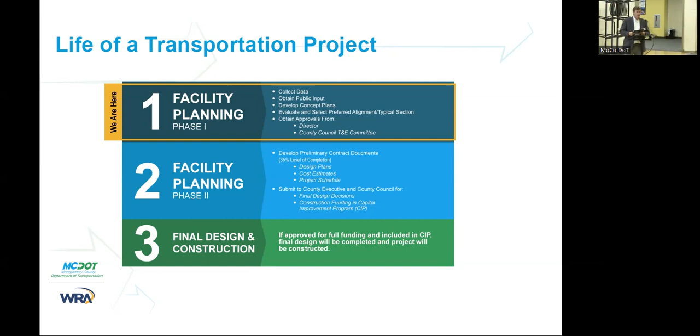We are starting the project tonight meeting with the project outline. We will present the following outline tonight: project limit, project overview, purpose and need, and conceptual design for the following four alternatives.

Alternative 1, no build, no improvement to Old Columbia Pike and Prosperity Drive. Alternative 2, improving intersections within the limit of the project, as well as adding new sidewalk and side path along the road. Alternative 3, improving intersection safety and operation, adding sidewalk and side path, and opening the existing bridge to traffic. Alternative 4 is alternative 3, plus widening Old Columbia Pike and Prosperity Drive to 4 lanes and replacing the existing bridge.

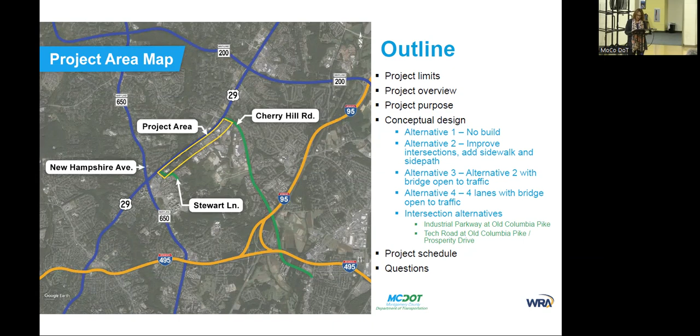Next, we will discuss intersection improvement alternatives at Old Columbia Pike with Industrial Parkway and Tech Road. Then we will go over the project schedule, and lastly, we will finish with the question and answer session.

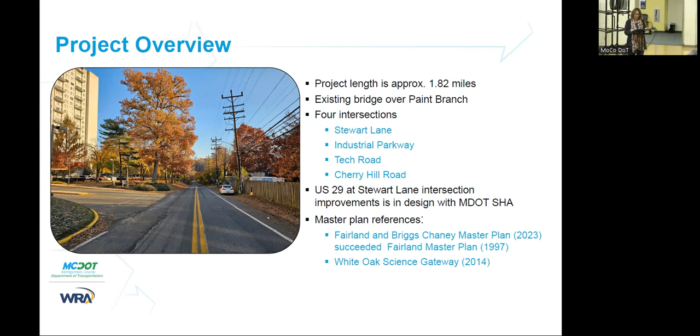Old Columbia Pike and Prosperity Drive is approximately 1.82 miles long. The road from Stewart Lane to Tech Road is called Old Columbia Pike, and from Tech Road to Cherry Hill Road, it's called Prosperity Drive.

There are 4 major intersections within the limit of the project. Beginning at the southern limit of the project and traveling north, these intersections are Stewart Lane, Industrial Parkway, Tech Road, and Cherry Hill Road. The project is being closely coordinated with the MDOT SHA Intersection Improvement Project at US 29 and Stewart Lane. It has been included in the 2023 Fairland and Briggs Chaney Master Plan and the 2014 White Oak Science Gateway Master Plan. Our concept plans are following recommendations in the master plans.

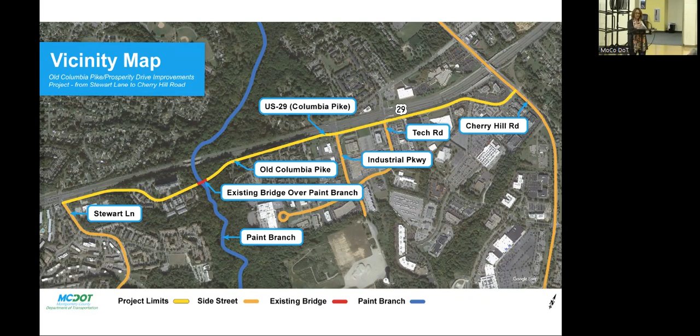Next slide, please. The purpose of the project is as follows: we are focused on the connectivity and safety needs along Old Columbia Pike and Prosperity Drive, improving the existing traffic pattern, operation, and geometry deficiencies, installing sidewalk and side path along Old Columbia Pike and Prosperity Drive, improving drainage issues within the limit of the project, and enhancing safety for pedestrians and bicyclists in keeping with Montgomery County's Vision Zero Action Plan. The goal of the Vision Zero Action Plan is to end serious injury and death on our roadways.

Encourage equity and accessibility by providing continuous pedestrian facilities to promote a safe environment for pedestrians and bicyclists. This project will benefit the underserved communities.

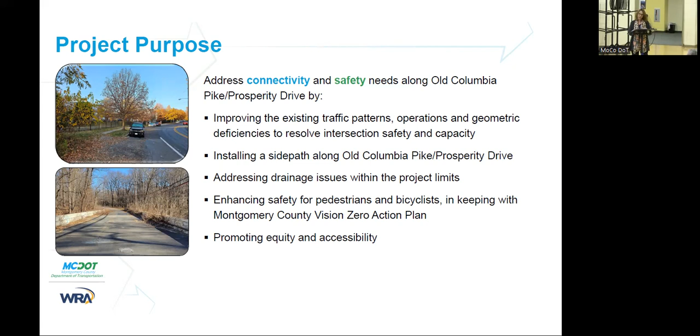Bridge over Paint Branch: the bridge is approximately 200 feet long and 27 feet wide. It was built in 1912, widened in 1930, and rehabilitated in 1973. This bridge has been registered with the Maryland Historical Trust, and it is eligible for listing in the National Register of Historic Places. Currently, it is closed to vehicle traffic but open to pedestrians and bicyclists.

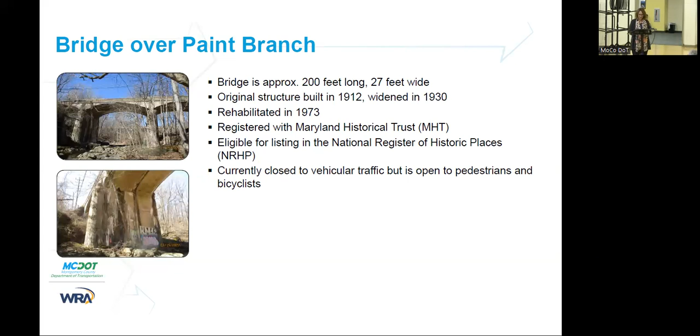I'm turning it over to Mike. Good evening. On the next couple of slides, I'm going to walk through some of the existing conditions, some of which are good and some of which we will be looking to improve.

On the first photo, you can see, as we all know, some traffic backups that occur on Tech Road and Industrial Parkway. So part of what we'll be looking at, not the total focus of this job, is to improve traffic operations at these intersections.

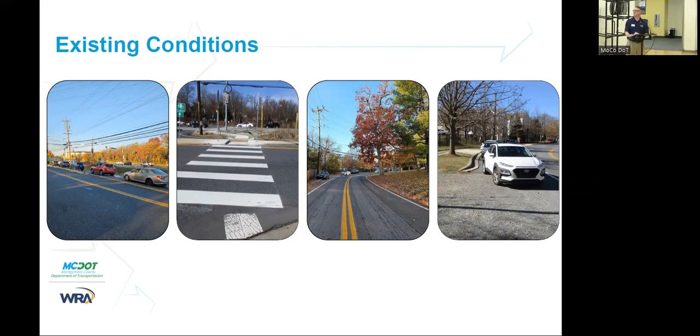Some other issues are ADA or sidewalk ramps that are not ADA compliant. The second photo actually shows a pretty good example of one that is compliant, but there are other ones throughout the corridor that need help. There's also some unsafe or unorganized parking that occurs, especially south of Paint Branch Bridge, and so we'll be looking to improve those issues.

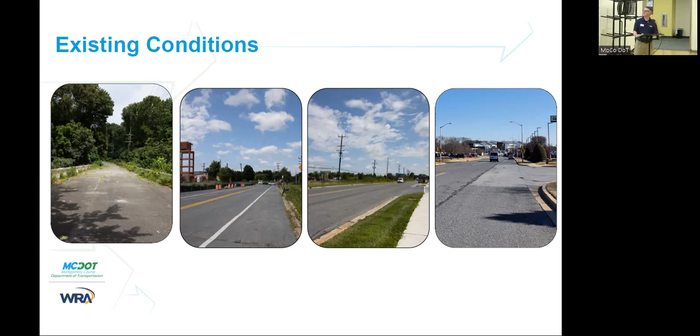Here are some photos walking through the corridor: the bridge over Paint Branch that's open to pedestrians and bicyclists, then up towards Industrial, Tech, and then up towards Cherry Hill Road.

Some of the pedestrian and bicyclist improvements that we'll be looking to make under all of our alternatives include adding 6 foot wide concrete sidewalks, and a 5 to 6 foot wide grass buffer, which is just the area from the curb out to the sidewalk or side path. We'd also be looking to add a side path on the other side of the street, and we'll get to that when we get into the alternatives.

That would always be a 10 foot wide side path with a 5 to 6 foot wide grass buffer. That side path provides space for not only pedestrians but also bicyclists or personal electric vehicles such as scooters. On all the alternatives, there would be pedestrian and bicyclist improvements all the way from Stewart to Cherry Hill, and at the intersections we'd look to provide ADA compliant crosswalks and geometric improvements.

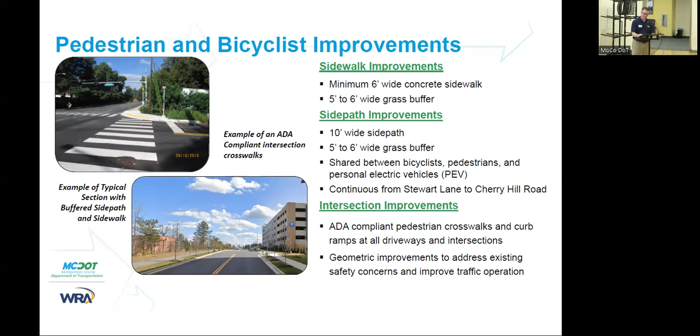Some of the ways we'll make this project safer for pedestrians include protected intersection design. In the upper left corner is an example of physical separation of vehicles and pedestrians, clear signage, clear pavement markings, and even push buttons for pedestrian signals.

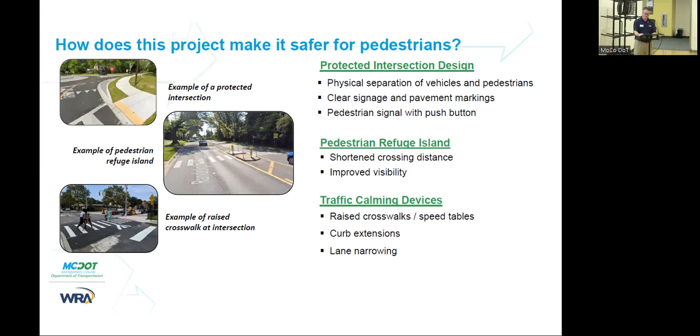Also, pedestrian refuge islands make the crossing shorter and improve visibility for motorists and pedestrians alike. We'll also look at potentially using traffic calming devices such as raised crosswalks, speed tables, curb extensions, and lane narrowing as we move forward into planning.

Our design is also guided primarily by the Montgomery County Complete Streets Guide. This is a guideline that's come out in the past few years that is really focused on pedestrians and bicyclists, but also keeps the needs of all users, including motorists, in mind.

There are 3 street types from that manual that apply to this corridor: the neighborhood connector, Town Center Street, and Town Center Boulevard. On the next few slides, we'll go over each of those types.

The first one, the neighborhood connector, applies from Stewart Lane up to Industrial Parkway. It has a 25 mile an hour target speed. I'll define target speed as the desired speed that we design for, based on our design. It would have 10 to 10.5 foot wide lanes, a 6-foot sidewalk on one side of the road, and a 10-foot side path on the other side.

Neighborhood connectors are typically in residential areas, and they are good for all users, including pedestrians and bicyclists, but they can also even support transit.

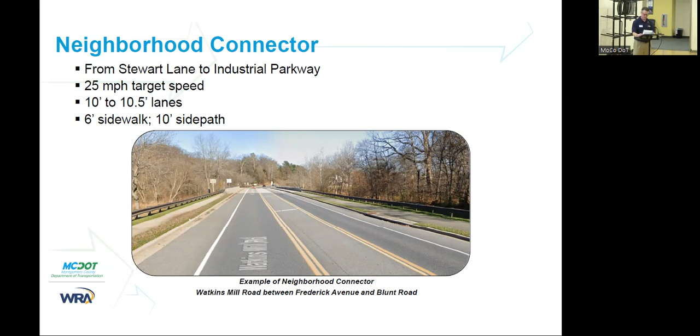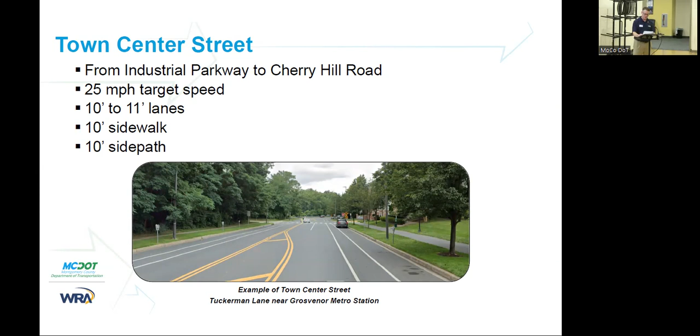The next slide shows the Town Center Street type that runs on this corridor from Industrial Parkway to Cherry Hill Road. It also has a 25 mile an hour target speed with 10 to 11 foot lanes, and the sidewalk goes up to 10 feet while the side path remains 10 feet. Town Center Streets are usually in residential areas, but also more commercial ones, and they can have on-street parking and more significant pedestrian and bicycle activity.

The next slide shows the last of our street types, Town Center Boulevard. This is for multi-lane roads, and only applies if alternative 4 is selected, which is the only alternative with multiple lanes. If that alternative were picked, this street type would apply all the way from Stewart Lane to Cherry Hill Road. The target speed goes to 30 miles per hour, with 10 to 11 foot lanes, a 10-foot sidewalk, and a 10-foot side path. So that is our 3 street types.

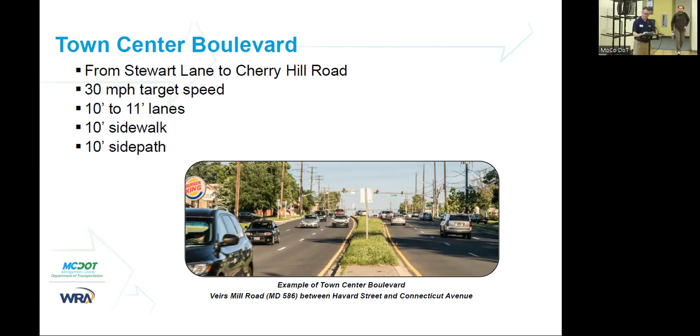So with that, I'm going to turn it over to Cheng.

Thank you, Mark. Full disclosure, I'm an engineer, not a motivational speaker. I'll try to keep you engaged and hopefully not put you to sleep as I go over the next 30 slides. There's a lot of information to cover, but there will be a question and answer session at the end, and people online can post their questions through the chat to Lori. So please remember everything I say—don't fall asleep by the end.

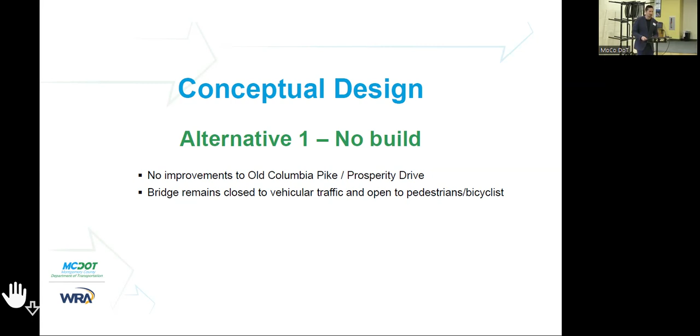The first alternative is no build, self-explanatory. This will stay status quo, and the bridge will be closed to vehicle traffic but open only to pedestrians and bicyclists.

Alternative 2 will improve intersections within the project corridor and add sidewalk and side path. The Pike and Prosperity Drive will remain 1 lane in each direction. We'll improve intersections, install pedestrian and bicyclist improvements, and install lighting where it's wanted. The bridge will remain closed to vehicle traffic and open to pedestrians and bicyclists only.

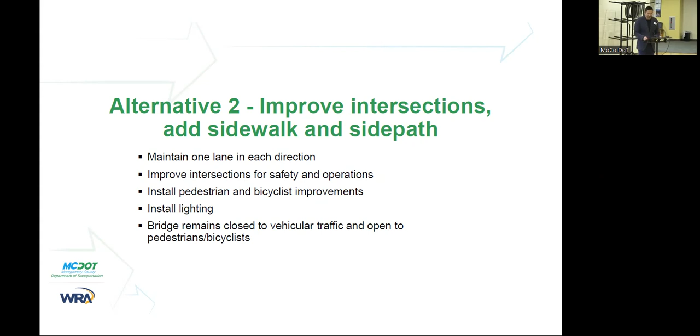Now, for the next couple of slides, we're going to walk through the project corridor. We're going to start from the south, starting at Stewart Lane, and then we'll progress moving north.

US 29 is a state-owned, SHA-owned and maintained highway. Old Columbia Pike is a county-owned roadway. SHA currently has a project in design that improves pedestrian crossing at US 29 and Stewart Lane, and also at the Old Columbia Pike intersection. We're going to relocate the existing connector a couple hundred feet to the north, because there's a storage and queuing issue there that they're trying to resolve. They're designing the improvements based on Montgomery County's complete street design guide, and install a side path on the east side with buffer, and then parking with curb extensions to improve pedestrian safety.

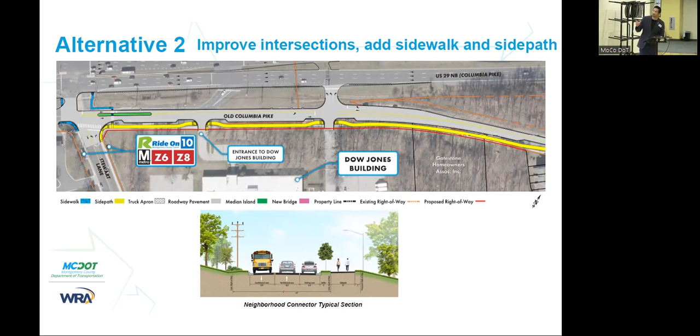The typical section is 10 and a half foot lanes, an 8-foot parking lane, a 5 to 6 foot buffer, and a 10-foot wide side path. There won't be any sidewalk on the west side in this segment because of the close proximity to US 29.

As we progress north, when Old Columbia Pike moves away from US 29, that's when we add a 6-foot wide sidewalk on the west side with a 6-foot wide buffer. We continue the same on the east side moving towards the bridge. Vehicle traffic will have to turn right at Carriage House Drive as they do today, and pedestrians and bicyclists can continue north using the existing asphalt surface to cross the bridge.

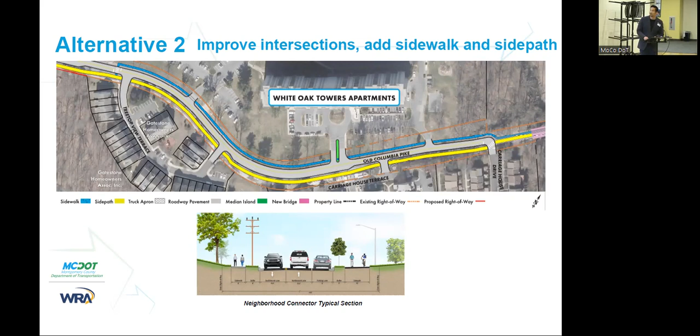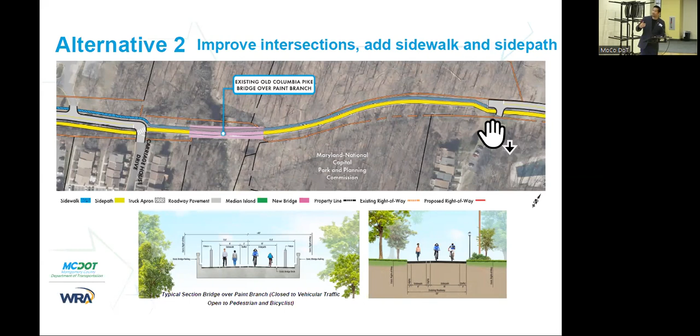Next slide. On this asphalt, we'll add solid white pavement marking to differentiate the sidewalk and the side path, with a buffer in between. Lighting will be added in this segment because it gets pretty dark there at night. When it joins up with Old Columbia Pike on the north end of the bridge, the sidewalk will consolidate with the side path, because we won't have any sidewalk on the west side due to close proximity with US 29, but the side path will continue north from there.

This is a rendering of what it may look like standing south of the bridge looking north. You can see the existing bridge with lighting on the side, pedestrian railings, and solid white markings on the ground.

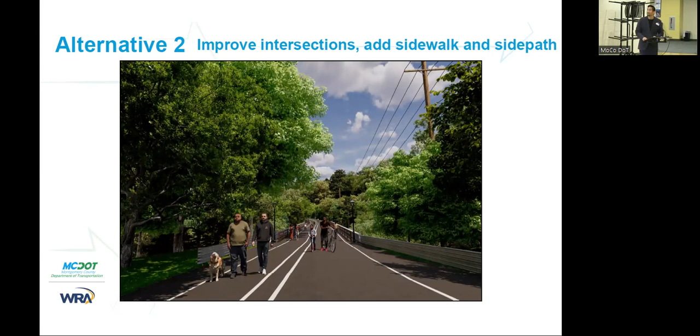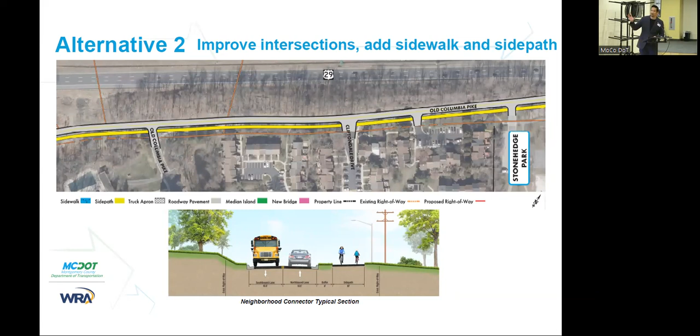Continuing moving north, US 29 is on the top of the screen, north is pointing to the right, as you progress north towards Stonehedge Park. There is an existing park improvement project - they want to replace some equipment, but our proposed improvement has no conflict with what they're trying to do there. The existing side path there will remain in place.

Moving north from Industrial Parkway, Old Columbia Pike / Prosperity Drive will be designed according to Town Center Street standards, as Mark described in earlier slides.

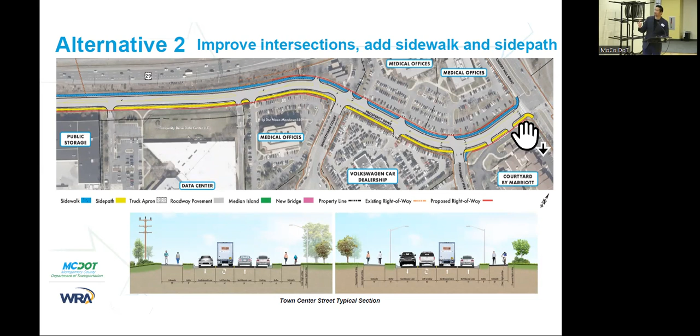As we come towards Cherry Hill Road, there's a data center on the east side where the hand points, and then medical offices, a car dealership, and a hotel. Here, parking will be made available on the east side to the extent that it's safe, and then there'll be a 10-foot wide sidewalk on the west side, and a 10-foot wide side path on the east side with 5 to 6 foot wide buffers.

In Alternative 3, everything outside of the bridge will be the same as what I've described in Alternative 2, except the bridge will be open to 2 lanes of traffic with pedestrian and bicyclist accommodations.

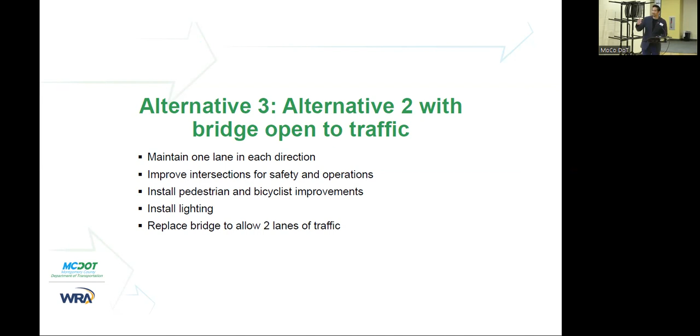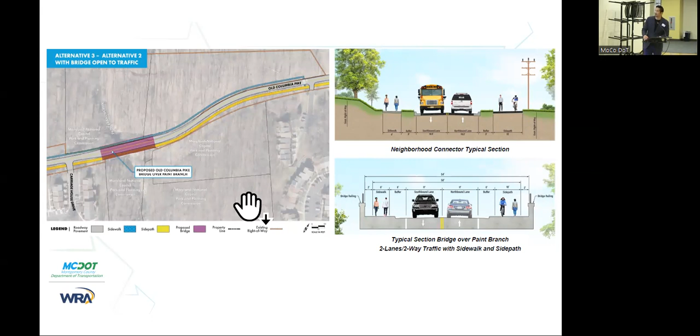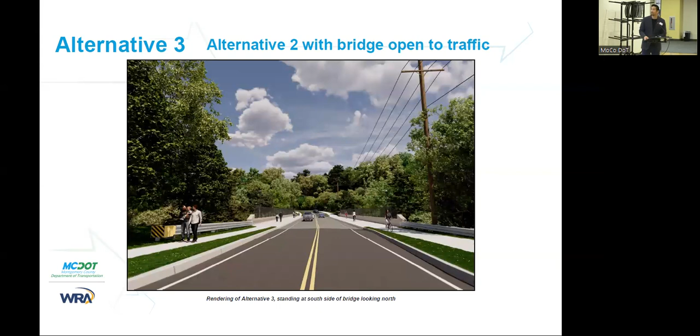In alternative 4, there'll be 4 lanes of traffic, and the bridge will be replaced to allow 4 lanes of traffic. This was one of the recommendations mentioned in the White Oak Science Gateway Master Plan, published back in 2014, to make Old Columbia Pike a 4-lane arterial roadway. However, in the same master plan, they did say that prioritizing multimodal connectivity and safety is a higher priority that we are trying to accomplish with this project.

Generally, a four-lane roadway will have a capacity of 20,000 to 30,000 vehicles per day, and a two-lane roadway has a capacity of approximately 15,000 vehicles per day. But our traffic model shows only 4,000 vehicles per day along Old Columbia Pike even in the design year, which two lanes is more than enough to handle.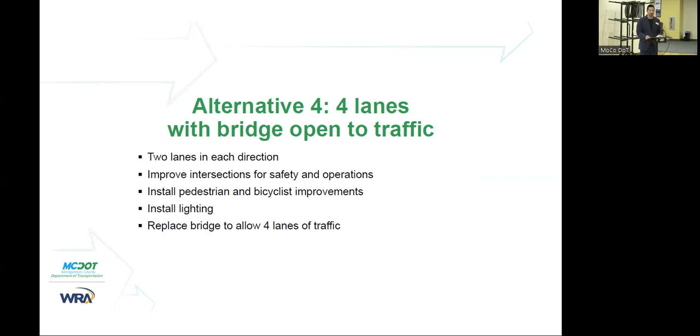Here, we'll tie into the SHA project, and then moving north, it'll be a four-lane, very wide section. There'll be two lanes in each way, a center median/turn lane, and then an 8-foot wide sidewalk on one side, and a 10-foot wide sidewalk on the other side with buffers.

As you can see, there'll be a significant impact on the townhouse community on the east side.

The bridge will be replaced with a significantly wider bridge to accommodate the wider section. There'll be significant environmental impact in this area because there's a Paint Branch, and also a lot of forested area in this segment.

The same thing, big section pushes along. It'll be a town center boulevard, as Mark described earlier.

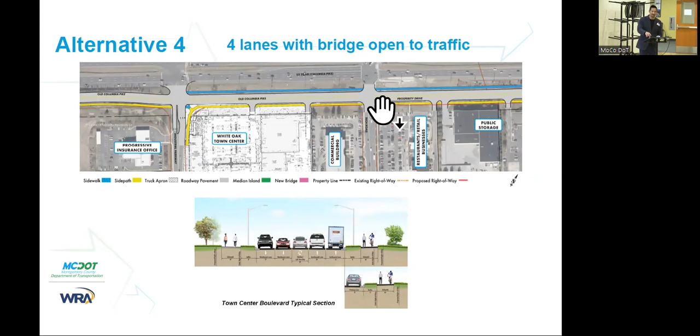As we approach Industrial Parkway, the sidewalk on the west side will be terminated because it's getting too close to US 29. If we go to the following option, the intersections at Industrial and Tech Road would need to allow through traffic. However, that creates a signal phasing problem that will not work with the US 29 intersection. The two intersections are too close to each other, and the problems at Industrial cannot be effectively resolved without resolving the traffic problem at US 29 at those two intersections. US 29 is a state-owned highway, so it is outside of this project scope.

The same intersection goes on to Cherry Hill Road, and significant impacts will happen. We'll have to take parking away from medical offices and the car dealership.

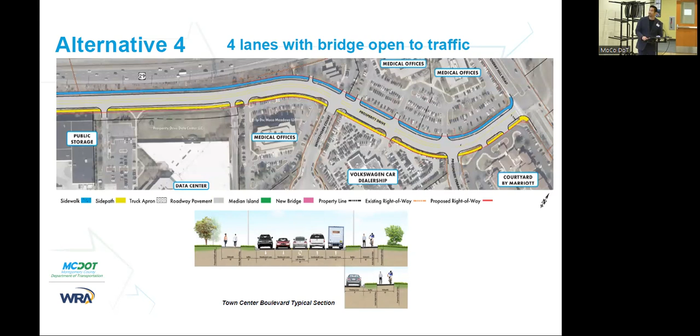Now we'll proceed to focus on the two intersections at Industrial and Tech Road. I'll first talk about the existing conditions there today.

Obviously this intersection lacks any ADA compliant pedestrian crossings. There's a lot of available pavement area there today, but there isn't clear pavement marking to tell people where to go, and that creates a problem.

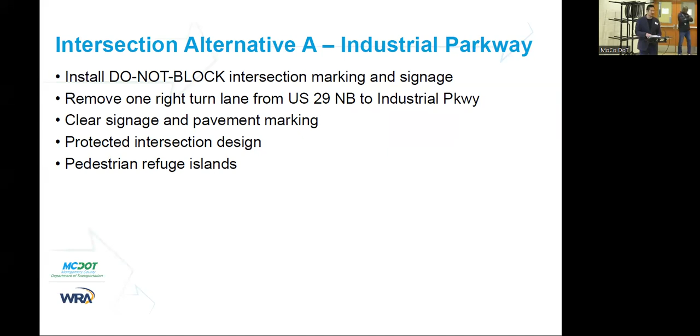These are some of the features that we propose in intersection alternative A at Industrial Parkway. I'll get more into detail on the next slide.

Intersection alternative B for Industrial Parkway is an incremental step up from alternative A, where we will relocate the existing signal from US 29 to Old Columbia Pike.

So vehicles will stop right there where the hand is. For westbound vehicles, they will stop there when the signal for westbound traffic is red, and when it turns green, the traffic will proceed and move on to US 29. That way, the pedestrian crossing across Industrial Parkway can be signalized, and the pedestrian crossing across Pike can be signalized as well, significantly improving pedestrian crossing.

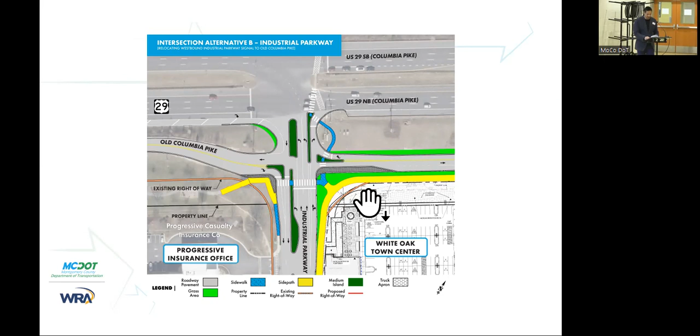Now moving on to Tech Road. As some of you who frequent the area may be aware, westbound traffic gets backed up and blocks the entrances to businesses like the Chick-fil-A restaurant in the business area down there, as you can see in the picture. Again, drivers get impatient because the queue gets long and they just ignore the stop-here-on-red sign.

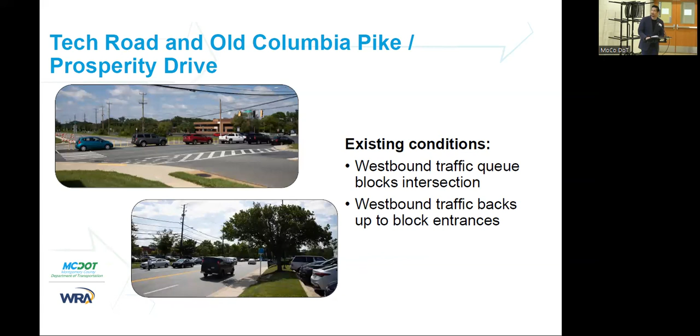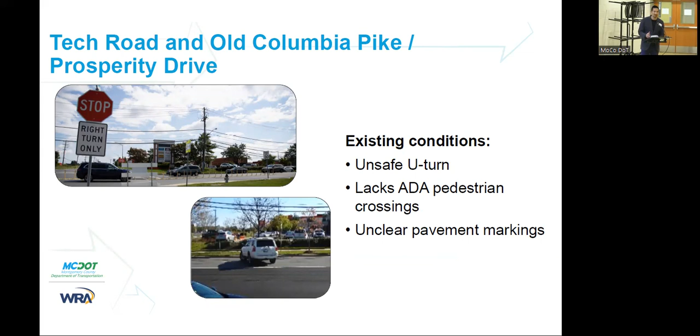There's a flexi yellow post in the middle right now. Oftentimes when westbound traffic clears the flexi post, they will make a U-turn to cut the queue. Again, this intersection lacks ADA pedestrian crossing, and there's a lot of pavement area, but lacks clear pavement marking to tell traffic where to go.

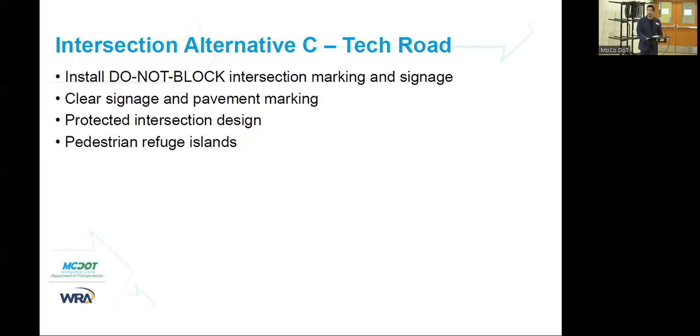In intersection C at Tech Road, I'll go through some of these proposed improvements on the next slide. Similar to intersection alternative A at Industrial Parkway, the traffic pattern remains the same, but we will add do-not-block-intersection markings and signage, high visibility crosswalk markings, and a median along Prosperity Drive to provide a pedestrian refuge island.

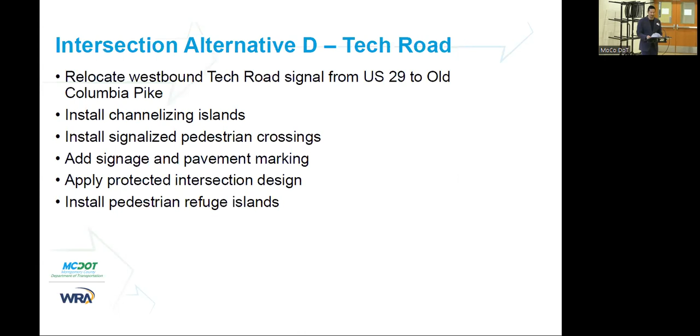Intersection alternative D at Tech Road is a step up from intersection alternative C. Similar to Industrial Parkway's alternative B, we relocate the signal head from US 29 to east of Prosperity Drive, so vehicles will stop there. That will help provide a signalized pedestrian crossing, so westbound traffic will stop where the hand is right now. When the signal head is red, they'll stop there, and when it's green, they'll proceed to US 29. That will help resolve the blocking intersection problem.

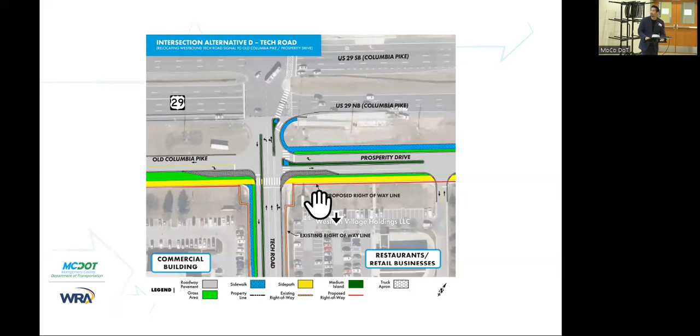Next, let's look at a summary of the alternatives. The main thing I want to cover is the cost. Alternative 2 is estimated at 25 million, including right-of-way and construction costs. Alternative 3 is 40 million. Alternative 4 is 60 million. You can also see the forest impact, vehicle impact, and right-of-way impacts.

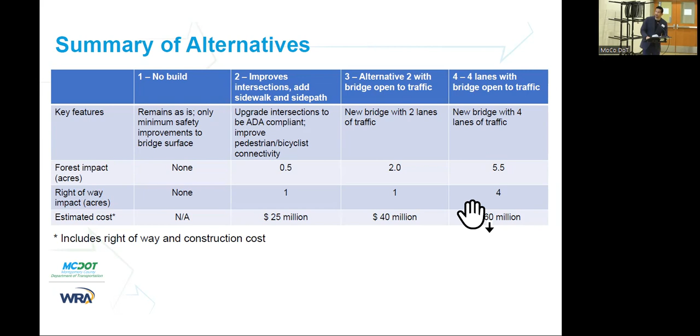Next, I will pass it to Yasmin to talk about the project schedule.

This slide indicates where we are with respect to the project schedule. The project started in January 2022. Concept plans were developed by April 2022. The first public meeting was presented in March 2023, and tonight we are presenting the second public meeting. The project will be completed by winter 2023. At that time, we begin the transportation environmental review, and then the project will be presented to our director and the county council T&E committee to obtain approval. The second phase of the project, the preliminary design, will start after receiving approval.

This is the end of our presentation. Please feel free to contact me if you have any questions or comments. My phone number and email address are shown here, along with our website and project link. You can go to our website to review our plans.

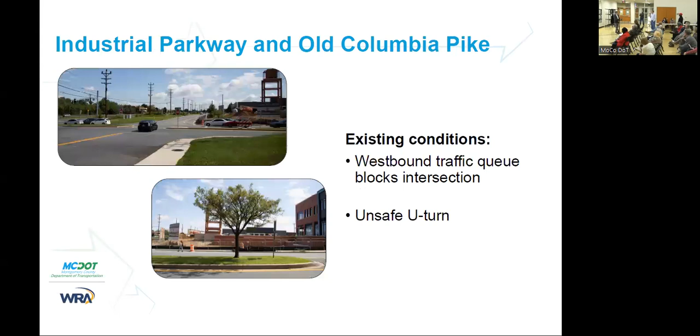Anyway, that's the key things, and I could go into a lot more detail. Part of it, it doesn't seem like you went back to the LATIP design for the interchange, for the intersections, and there's actually a pretty good design in there for Industrial, and I think the same thing could be applied to Tech Road to make the intersections safe.

So thank you very much for those comments, and we will take them into consideration going forward. So thank you. There's somebody behind you.

No, go ahead. Hello, I'm Eileen Finnegan, and I have a really basic question. I'm familiar with the White Oak Science Gateway Master Plan, and I'm familiar with the traffic modeling that was done at that time, which is almost 10 years ago now, maybe even longer. I'm curious about your modeling parameters for this, and I'm questioning, given the large capital costs and the potential question of the bridge, what modeling parameters you've used.

For example, there are some problems with the COG 9. If you used COG 9, there were some big problems with it because it did not include the FDA numbers in it. There was a big mistake down in Park and Planning, and they didn't think anybody was working at the FDA. 10.0 is out now, but that does not really look at the full build-out at Viva White Oak or the full build-out for the White Oak Shopping Center. And those were the big drivers for requiring some additional local capacity and using the Paint Branch Bridge as that way of providing that capacity.

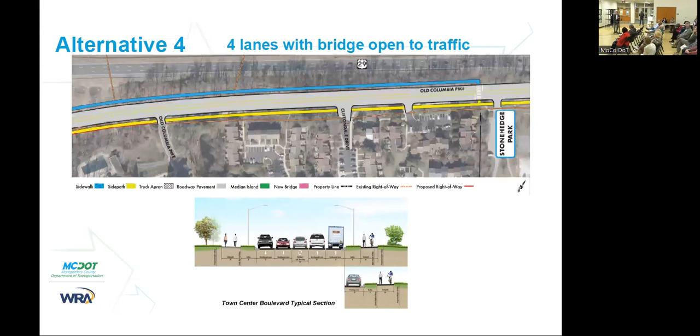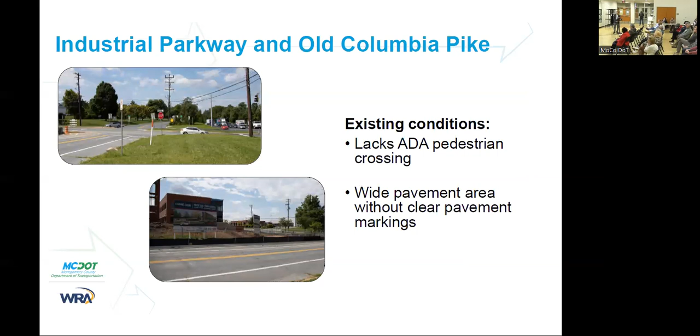I just wanted to make a comment about the intersection at Old Columbia and Industrial. I live in that neighborhood, and it's already difficult to get in and out of our neighborhood without there being some sort of light there. I really do think that needs to be addressed, because if there's no light on Old Columbia Pike at Industrial, there at least needs to be some kind of ramp or something to get out of that neighborhood. It's really, really unsafe right now, and I just don't think the existing options are going to address that.

Hey, thank you for the comment. Hi, my name is Corrine Majdanovich.

I live in the Stonehenge community, which flows right into Old Columbia. And as the previous speaker talked about, it's a nightmare right now for people that live in those communities to try to get from Old Columbia around Industrial Parkway onto 29. To be honest, this design looks more confusing than what we have right now, and I don't know how it solves any problem. I just hope that you focus on, as the previous speaker said, the intersections first. Everything else is beautiful to have these walking paths and biking paths, but these intersections affect daily life, a lot of people. Also in our community in front of Stonehenge, school buses stop on Old Columbia and pick up children. I can't imagine what's going to happen if you open a bridge and add more traffic onto this road.

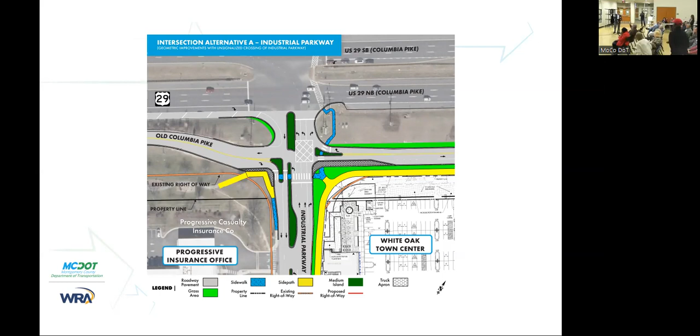Thank you for your comments. The question is who and when. So at the end of our facility planning process, which includes a presentation to our Director of Department of Transportation and to the Transportation Environment Committee of the County Council, they make the decision. Essentially, the county executive can make a recommendation in his budget, and the county council approves the budget. So if an option were chosen and money put towards a final design and construction, those are the decision makers.

Good evening, and thank you very much. I'm the White Oak Planning Manager. I work with Mr. Bunday. The only thing I wanted to do is re-emphasize what Dan said, which is there is an existing and approved local area transportation improvement program. Both at Tech Road and Industrial, you're going to have double lefts coming in, so you've got to have two receiving lanes, both on Industrial and Tech Road. Thank you for that comment.

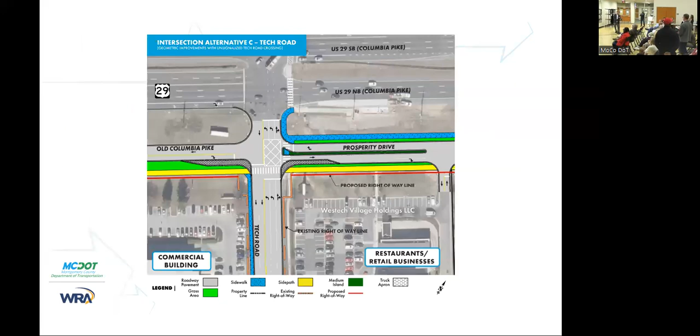It's David Bickle. I live on the other side of Old Columbia Pike. It's still Old Columbia Pike on the other side of the highway as well. Right here on Industrial Parkway, once you cross over the highway going west, there's like a 2 foot drop right there, and it doesn't connect to anything. You literally go into a dirt path that then goes over to Old Columbia Pike. So back to the drawing you were just at, you can't really see it there, but at that crossing where it goes west, once you make it to the west side of Old Columbia Pike, there's just a concrete area and then it goes into dirt.

So I would second what Mr. Peter said. We need to nix 3 and 4 on redoing the bridge and spend more time on the crossings here. Especially, I've seen people almost get hit at Tech Road and also here as cars don't obey the speed limit and the traffic lights as well. On the Tech Road one, I see people crossing when I have a left-hand turn to go north on Old Columbia or on 29 all the time. They just think no one's turning left and they pull right in front and then we have to wait for them to cross. So I think a pedestrian bridge would be really beneficial or something.

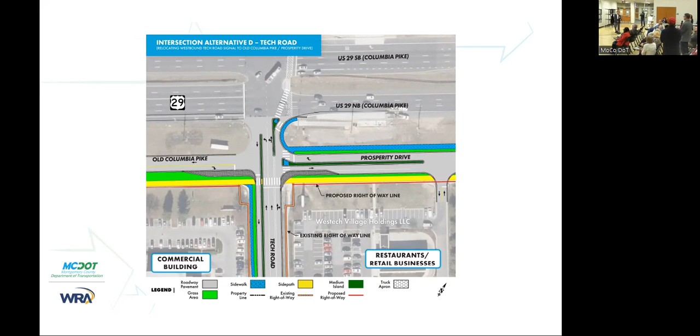When we're looking at the plans for Tech Road, I really don't think we need to have a one-way entrance there, because you've now made people like me, who are driving to Home Depot, unable to make a left where I used to. I have to drive all the way around to the back entrance, which isn't designed for a left-hand turn either. Then to get back home, I have to go all the way around the Seventh-day Adventist area.

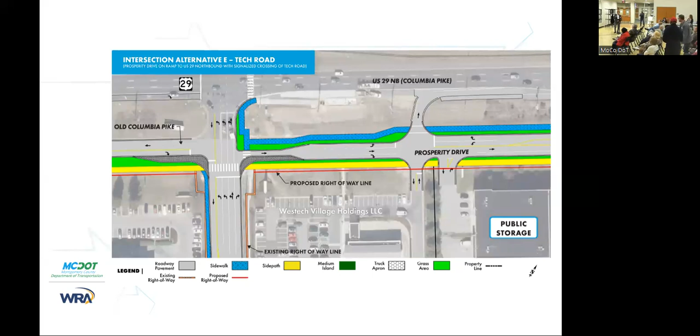There's one more, it's not coming to me right now, but I like what you've done. I think something needs to be done, but I'd like to spend the money more on Tech Road and the other intersections. So thank you for the comment. Maybe come see me or Yasi afterward to talk about your first point, I don't quite understand it, but it sounds like it may be an immediate safety issue we can look at right away if we get more information.

Good evening, my name is Alberto. I live in Columbia Towers condominium, and I cannot understand how we are giving more preference to vehicles over persons. We have a major road almost parallel at this old bridge, and in less than 2 miles, you are planning to add more vehicles to a road instead of considering people. I cannot understand why they would spend around 40 million on 2 miles, instead of focusing on people or bicycles instead of vehicles. That's my concern: fewer vehicles, more people, more nature instead of more vehicles. Thank you very much for your comment.